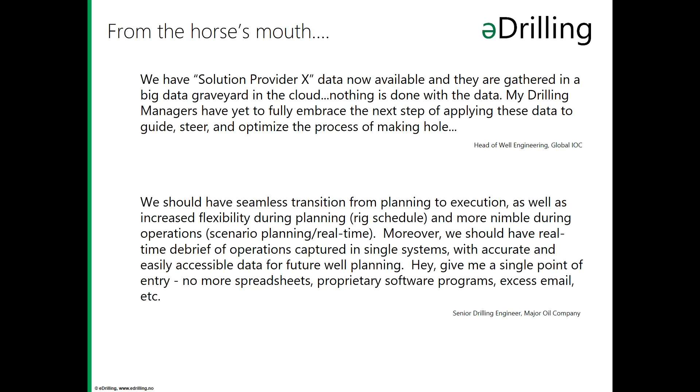So, what is digitalization? It's a good question. We have to apply some technology related to this. From our side, we have talked about the virtual well, or the integrated drilling simulator, ever since the start of the 2000s. But today it's a new word that's coming around.

It's called the digital twin, and the digital twin represents the well digitally, so that you can do forecast, real-time simulations, automated monitoring, and so on.

The digital twin is an integrated drilling simulator that has a hydraulics model, a temperature model - both need to be dynamic, of course - and a torque and drag and an ROP model. The important thing is that you have an infrastructure that enables these to be used in all of the different operational phases: operation, pre-planning, planning, engineering, training, and so on.

The digital twin, in our view, is also composed of a virtual well where you can actually see what's going on. You can see the risk picture, you can see your real-time data, you can see your simulated data. When you have simulated data of a simulated well, it's very easy to do forecasts and what-if scenarios, and use those in your work processes to optimize the operation.

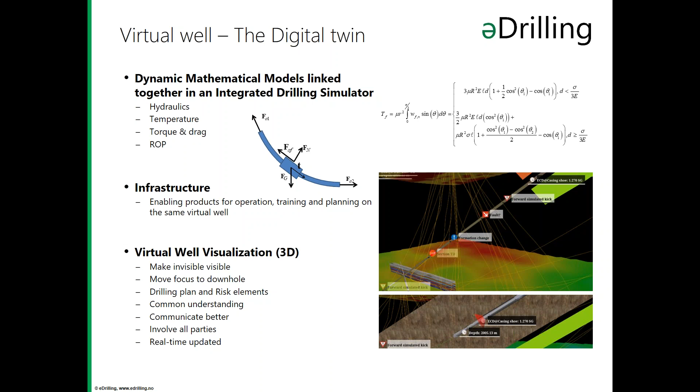So from our side, you need one integrated solution for the entire drilling process to be able to get to the digitalization - one model that fits everything, that you can use for all the operational phases: planning, design, operation, after operation, and of course preparations.

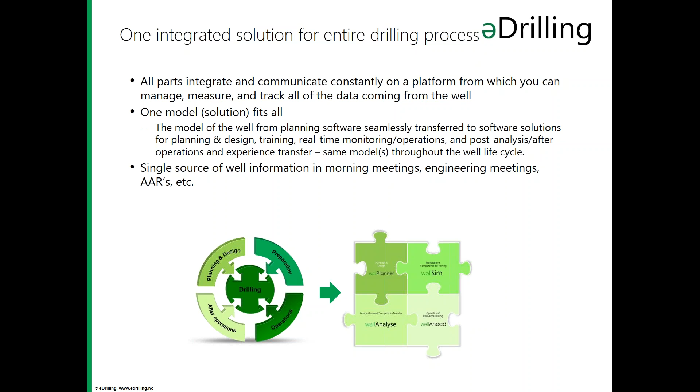So this is Statoil's digitalization roadmap. They have defined 7 different areas where they're going to do digitalization. One of them is to be able to utilize data for planning, real-time analytics, and increased automation. We are involved in this, and Morten's going to give you a bit more about the details.

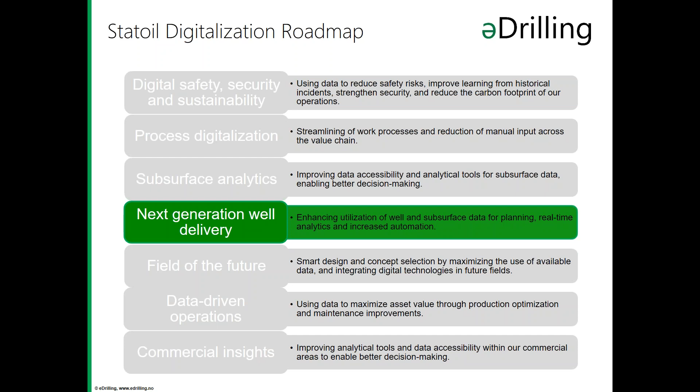So what's different from what we have been doing for the last 30 years or so, and what we are doing now? What we see is that everybody is doing what's very often called advanced monitoring, or something in that area. And the focus there is to look at the real-time measurements from the rig and compare that to simulation results that you have been doing prior to the operation.

And from that, you use people or engineers doing manual diagnostics. They can also run some new simulations if changes have been done. But if you look at what we are working on at the moment, and we have been doing since around 2008, it's what we call automated monitoring.

And again, there you have real-time simulations driven by the signals or the drilling data from the rig, and then you compare the simulation results in real time with the measurements that are also done in real time. That enables you to do automatic diagnostics on top of the manual diagnostics, and do self-detection and detect different operational statuses or problems in the well.

And the next level, as we see it, is what we call real-time optimization. By having a framework where you are running real-time simulations and doing diagnostics on it, you're able to do forecast simulations, forward-looking simulations, what-if simulations, and predictive analytics. So if you have an event occurring in your well that is detected by the system through automatic diagnostics, the next level is actually to run what-if simulations on how to solve this problem.

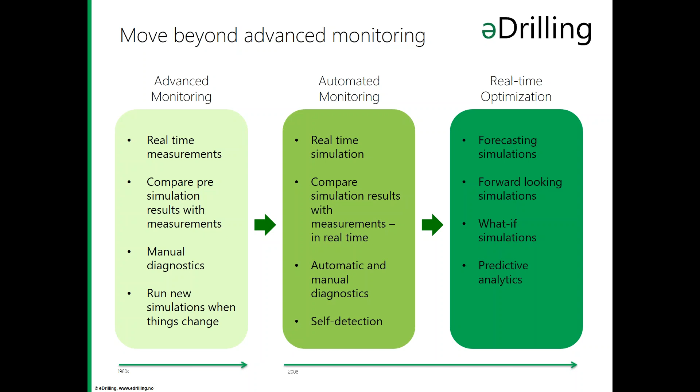And this is where we are looking more and more at our clients. They want to do more advanced or real-time optimization of their drilling and well operations. So this is where we have been doing automated monitoring and real-time optimization.

And we have clients like Statoil in Norway, CNOOC in China, and Wintershall, where we have been running a lot of real-time optimization. And this is just some of the rigs we've been on, a lot of these areas Statoil, but you also have some rigs in China, and you have the Imsa at Wintershall, for example.

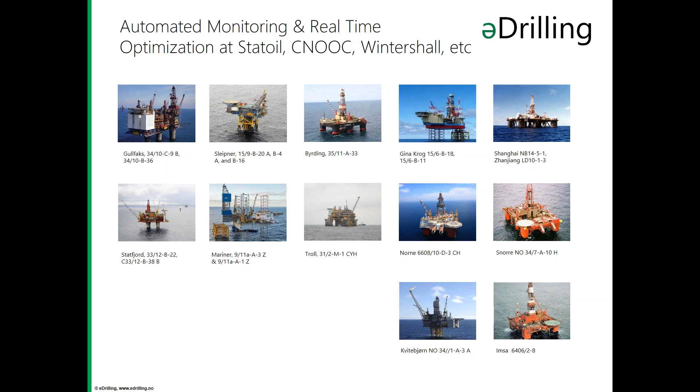I just wanted to talk a bit about the diagnostics, which is the next level from just having simulations. We call it real-time diagnostics. The basis of this is, of course, historical data, but again, the real-time measurements and the real-time simulations. And what we are using our diagnostics for is to detect operational statuses and also to detect downhole problems or changes.

On the right side here, you can see what we have implemented for one of our clients. We have integrated into their system, which they use to look at operations. And here you can see that we are writing messages back; here's an example with the calculated ECD below pore pressure prognosis. And below here you can also see the same thing in our 3D environment, that the message is appearing at the depth where it actually happens.

And again, by using automatic diagnostics or notifications, you can enable, as I already said, automatic what-if simulations and automatic forecasting based on the changes that you have been doing.

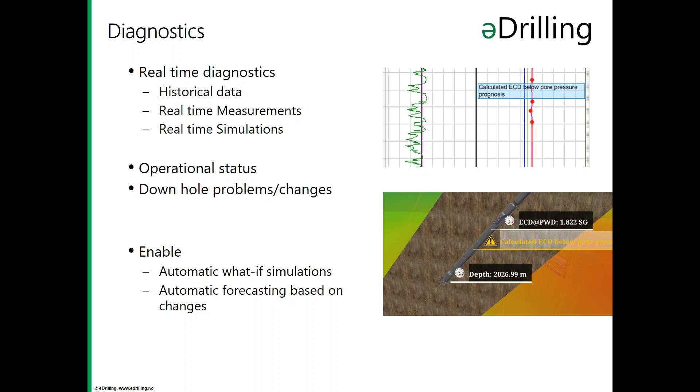What we see at many of our clients or oil companies that have had success in digitalization, or are on the way to success, is that they are looking at digitalization as the digital process on digital data. And what's important there is that data is available for all the processes.

And that means that if you have many systems working, or for example many software tools or simulation tools, you can make sure that you're able to do simulations on the same basis of data, and you can share data between them to make sure that all simulations are always updated. And what we see is that to do that, all applications or processes run in the same infrastructure, or at least have access to the same data store, by having an open and common API. And as you see, all application process outputs are also written back to the common data store.

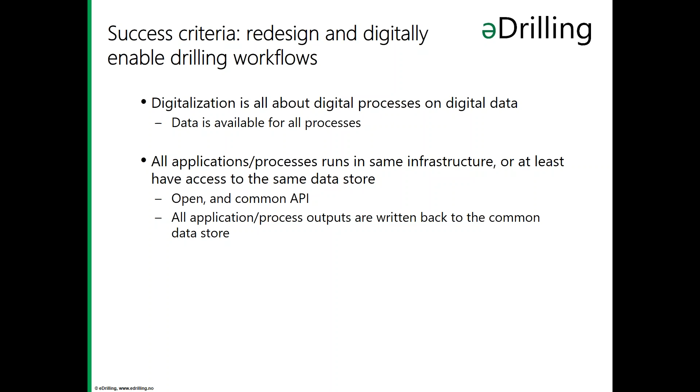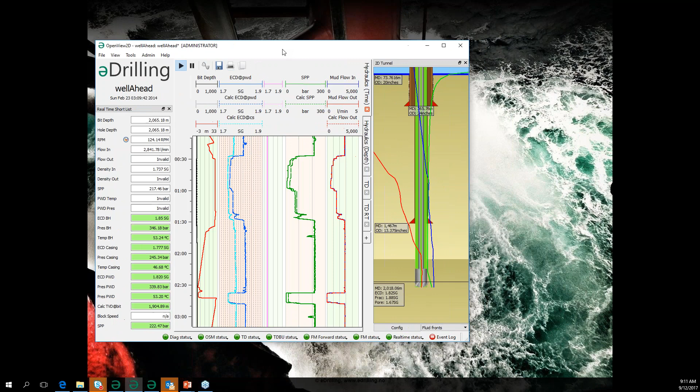So now we would like to show you some of the applications that we use to enable digitalization in the drilling operations. First of all, I will show you a very normal plotting tool, which everybody is using something similar to. This is a demo well that we are running on, so it's a bit quicker than real time.

And what you see here is that we typically have the normal things that we plot, but we have the measured ECD, and we also have it calculated at the PWD tool and at the casing shoe. And the same thing with standpipe pressure. So we have the measured standpipe pressure and calculated standpipe pressure, and you can compare them in real time. And this goes on not only for hydraulic simulations, but also for torque and drag simulations and so on.

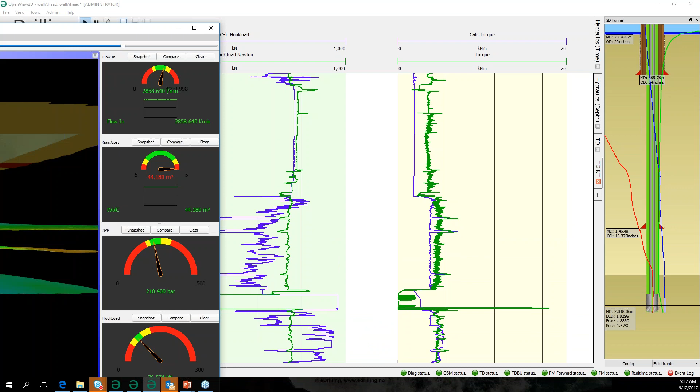We can show here, for example, some modeled hook loads compared to measured hook loads. As you see there, there is probably some more friction than should actually be in the well. But let's look at what we think is the next thing, which is what we have really been working on since the beginning: to be able to show data in a new way and get rid of the squiggly lines.

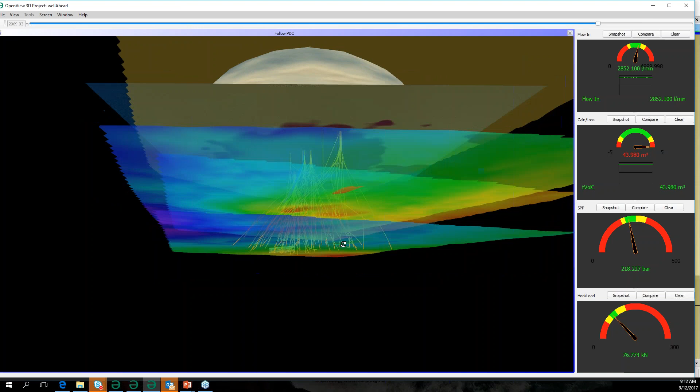As you see here, you can see many wellbores, and you see formation tops and everything here in a 3D environment. But what's really interesting is if we zoom in, you have the real-time rendered drilling operations. So here you see that you have your bit rotating, and we are moving downwards in the well. Here you also see that we have sensors along the string or along the wellbore.

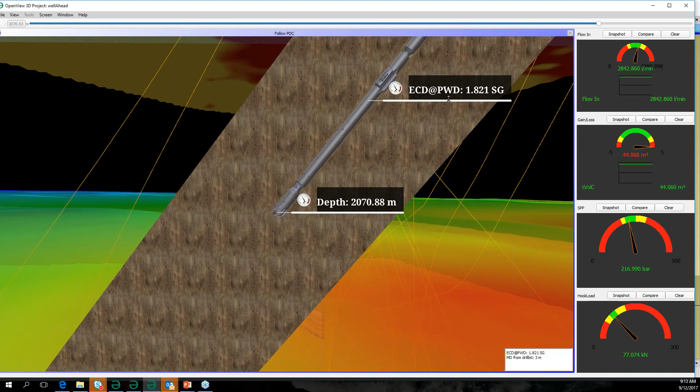So what we are looking at here is the bit, which is what we get from the real-time data flow. But the ECD here is our calculated ECD at the PWD tool. We could also add the real-time measured ECD and so on. If you zoom a bit out, we also see we have a plot along the wellbore. We have the temperature along the wellbore, and we also have the cuttings. There are really very few cuttings in this well, so it's not giving any good information.

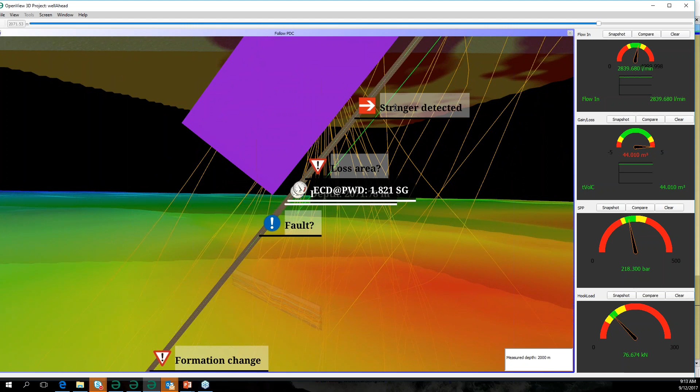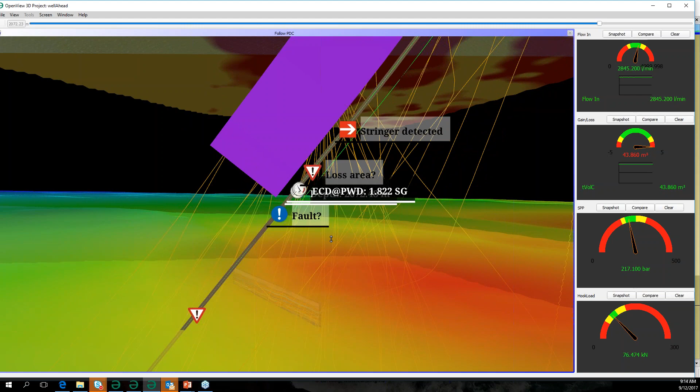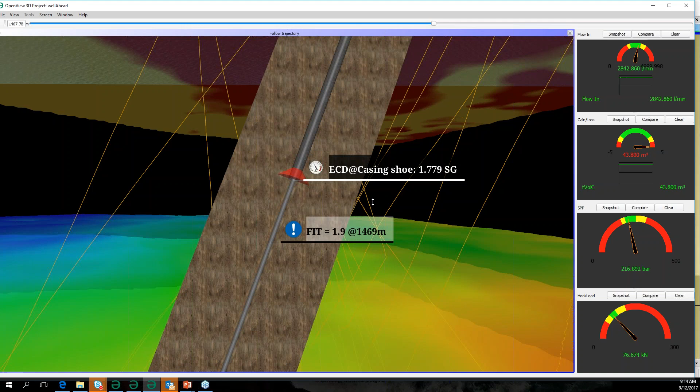On the other side here, we have typical notifications that we add along the wellbore, which make it possible to see the data in a real world instead of just in a message. If we go a bit up in the well, we have other messages. Here you have the casing shoe, where we also have the real-time modeled ECD available for all operations. You will also be able to see all the BHA elements going through the casing shoe, so that you can see why you get frictions and so on.

So here we are combining historical data, measured data, and model data, and by that we are actually utilizing all the digital data that's available in one screen. So this is the digital twin running together with real-time data and of course historical data. We didn't plan to talk too much about this, and we have given you a teaser about what we are looking at.

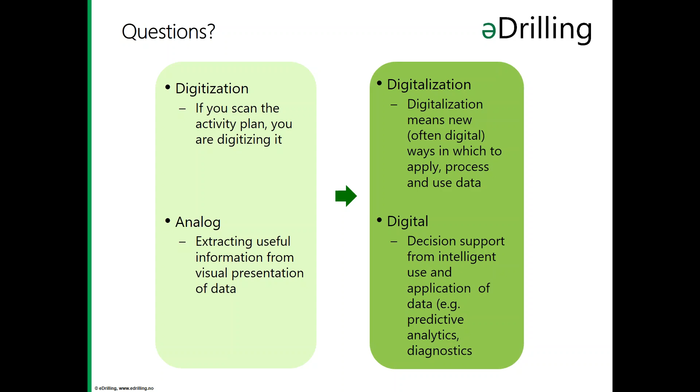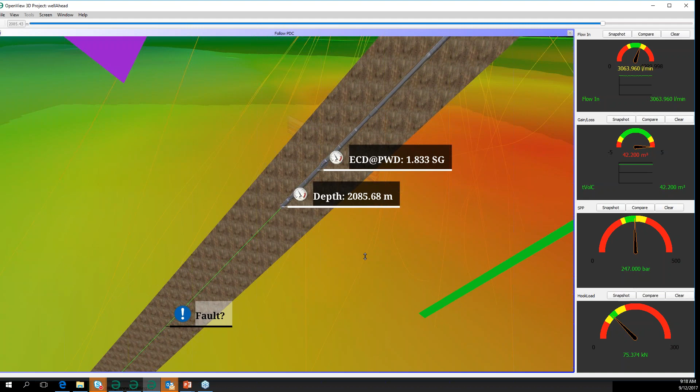Another question: will a driller have access to this, for example notifications of upcoming hazards? That's also quite interesting. The answer is that it's actually up to the clients who is going to have access to this. What we have seen is that some new clients actually have this 3D visualization available for the driller on the drill floor. That gives them the possibility to have a different view on the well, but also get all the notifications up. We also have some clients that are only using their own visualization or plotting tool, but then we write our diagnostics back to their system and make it available there.

By presenting this kind of information to the driller, he will move the focus to downhole instead of looking at the Martin Decker watch or looking at the drawworks going up and down. So we think this is a game changer for the industry to focus more on what's happening downhole and look forward. Yeah. So we got another question.

Can you take a data feed from a third-party model and use your digital twin? And that is a very good thing. We have our own hydraulics model and torque and drag model and so on that we use to represent our digital twin. But our infrastructure allows us to take data from any third-party model and also run that in our system and make it available. So you could use our system to show you real-time data, our model data, third-party model data and so on without any issues at all.

Will logging info from drilled offset wells be visible from all logging vendors? And that is quite interesting. In our 3D visualizations, we have had a big focus on the active well, the well you are drilling. But it's possible to add information from all the wells in the area around you. We have been doing that for some of our clients, and that has been quite successful. And very useful, because since we are doing this real-time rendering and we can update the well path with the measurements while you are drilling, you will also have a good view on your anti-collision issues.

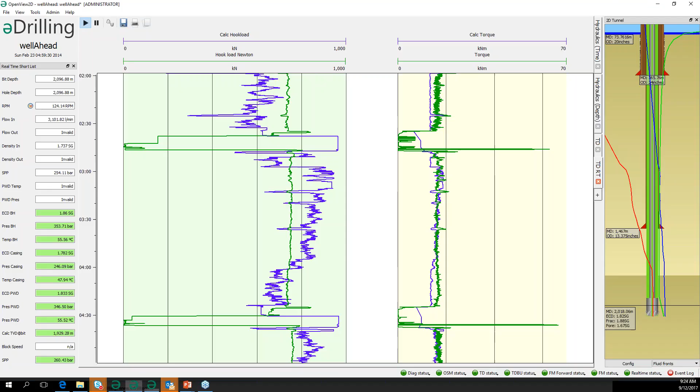We need to do comparisons of measurements versus modeled, and that is what we are using to trigger diagnostics. And by doing that, since we're doing it with computers instead of with people, we are able to detect things much earlier, very often, than you do normally. And then you're able to actually do something about your problem before it actually is there. Because you can say the uncertainty maybe is the difference between model and real-time data, and then you have a visualization of your uncertainties also.

Yeah, and there's always uncertainties, and when we do ECD calculations, we always compare it with the pore and frac prognosis and the collapse prognosis. But that's always also just prognosis, so there's an uncertainty there in itself. But since we are doing that, we can have really good control if you are within your prognosed window, and also look at the measurements if something is about to happen as well.

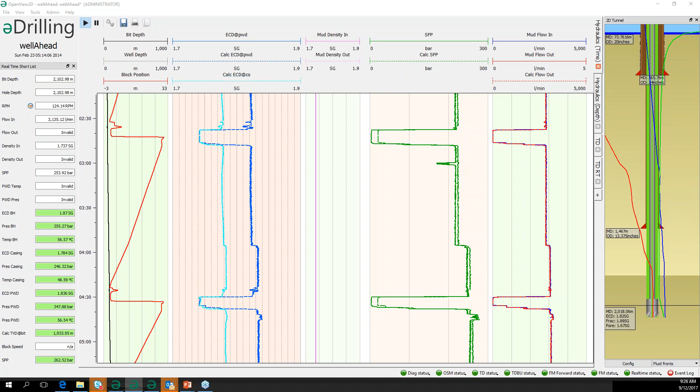Can you import experience from neighboring reference wells into your digital twin? Expected challenges, hazards, for example? Yeah, when it comes to the modeling, we are not taking all the hazards into the modeling, but we import issues that have been on neighbors' wells. So we know that if there's a formation top that is a risk, there's a possible fault, or there is a stringer or something like that, that is data that's available and visible for the users. But when it comes to the modeling, we don't take all those risk elements into it, because we are trying to explain how your well should look.

Do you see an opportunity for your approach in the world of P&A? Yes, that's quite interesting. When it comes to P&A, there are a lot of interesting operations performed. And when it comes to moving things up and down in the well and doing simulations on that, that is quite interesting. We are not into the area of cutting casing and pulling it out, but for simulations of the surge and swab effects, of course, but also for visualization to show where you are in the well, where you are compared to the different downhole tools and so on. That is very interesting.

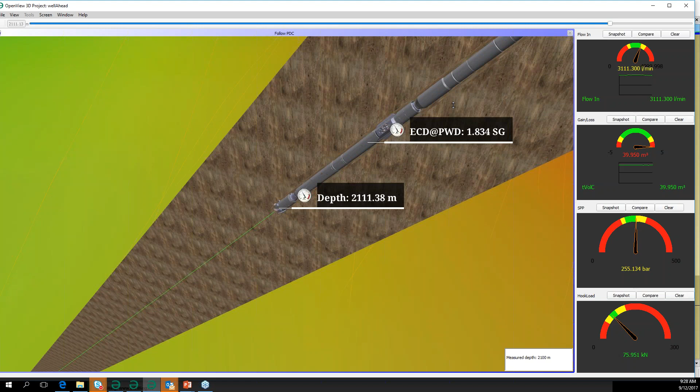So are you missing any types of data or information that would help, particularly in the area of predictive analytics or look-ahead capabilities? At the moment, we don't actually miss anything in particular. We are getting more and more out. The data sets that we are getting are better and better. But of course, to do predictive or forward-looking capabilities, we need to know a bit more of what's happening down there. And today, most of it is, as I said, pore and frac and collapse pressures, and that is very often available.

But also, of course, better data on the flow is appreciated. So a better flow out measurement would help us detect things even quicker than we do today. That's the signal that we see the poorest quality of. It's good when we have MPD operations where you have a proper flow meter, but in more traditional operations, the industry needs to be able to measure flow out better.

And we are also looking forward to all rigs getting real-time rheology readings and proper density readings. We see very often now that the density is manually input, and also very seldom rheology updates. That gives a possibility to do some not that accurate simulations, but as more and more rigs get these measurements, we get even higher quality on the simulations.